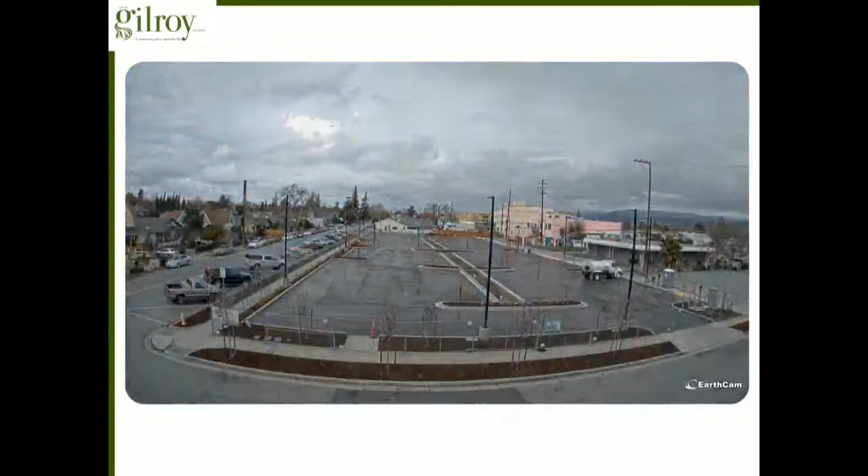That's a pretty cool project, so hope you guys enjoyed that.

So let's kick it off here. First of all, let's talk about why we have a CIP program. The CIP represents an ongoing planning process through which the city identifies, prioritizes, and develops a multi-year work plan for major capital expenditures and their associated funding sources. The CIP documents the project details required to improve and maintain the city's roadways, parks, facilities, and utilities, as you'll see as you go through the document there.

The different areas of our CIP program consist of our streets, which is our roadway system, parks and trails, parks, sports fields, park structures, trails, tree planting. Utilities, like Jimmy mentioned, water, sewer, and storm drain. We have a lot of those projects in the package here. And public facilities: city buildings, structures, and equipment.

The definition for a project to get entered into our CIP program has to follow these protocols here. Basically, they have to have a total value greater than $25,000, have an estimated useful life or extended estimated useful life of 5 years or more, require advanced planning and design, have a project duration of more than 3 months from inception to completion, and primarily be a non-recurring project. Also, it needs to be developed or implemented at a fixed location. That's the criteria to meet.

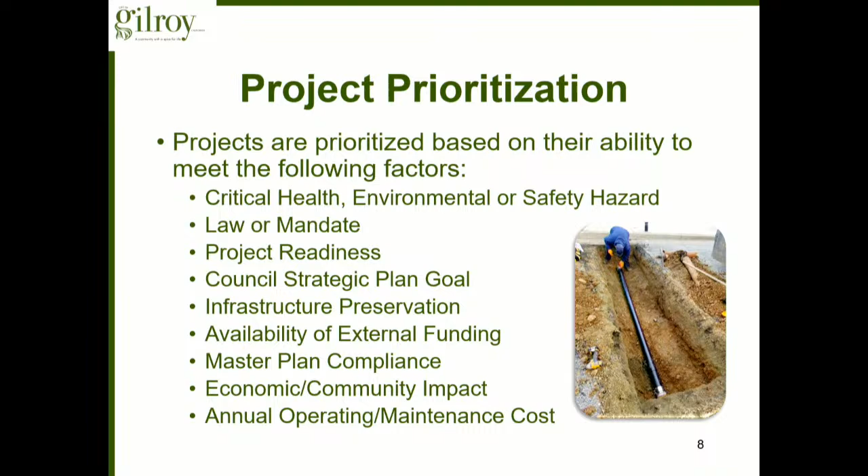Here's an example of one of the projects you'll see in your packet here. This is our Uvas bridge over Uvas Creek on 10th Street. We'll go through this as an example of what a typical charter will have that you'll see throughout your budget book. It basically contains this information: the project name, project number, the category, department, project type, project manager, council priorities, location, project photos, description and purpose, project justification, and master plan documents. So there's a very extensive set of information on each project that you can get familiar with if you're not familiar with these projects, to know where it's from, what it's for, why it's here.

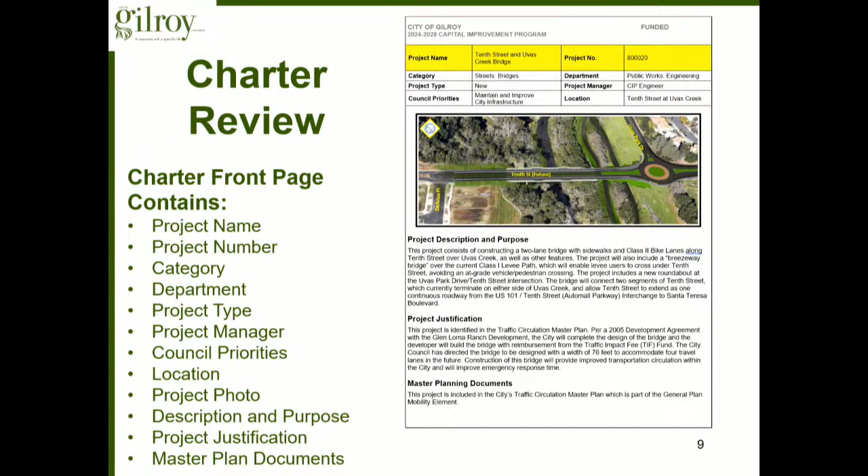And on the back of each of those sheets, you'll see there's more information. If you flip the page in your booklet there, that's the back page that contains the project funding, project costs, funding sources, financial comments, estimated project schedule, and ongoing operational cost impact. So you can look at where all the funds are coming from, what funds they're generated from, the schedule that we're trying to meet, and any more comments to help define the project for you. So this will give you a good resource to understand each of the projects.

Some highlighted projects we're going to talk about tonight. At the front end of your CIP book includes a section that highlights projects recommended for consideration by the City Council. The next several slides will provide a preview of those projects. Many projects are related to ongoing programs and are minor in nature that are included as well.

Annual citywide pavement rehabilitation. We're very familiar with this, we talked about it on Monday night. We just had a large award, over $6 million for our second year of our program. This project will rehabilitate the city's pavement condition. The city has 265 existing lane miles of paved roads with an asset value of over $332 million. The current funding seeks to maintain and improve our PCI amidst rising construction costs, and construction over the next 5 years is approximately $18 million of investment.

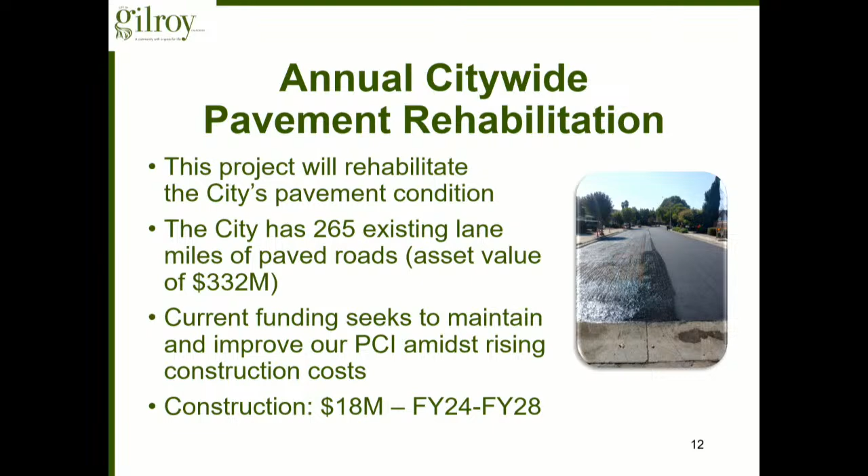Here's another fun project, the Ice Center Infrastructure Project. This project is to design and install the infrastructure for the future Gilroy Ice Center. It includes traffic signal and frontage improvements, site grading, stormwater and sewer collection systems, water distribution systems, joint trench for utility connections, and the approximate construction is about $5 million over the next couple of years, year 24, 25.

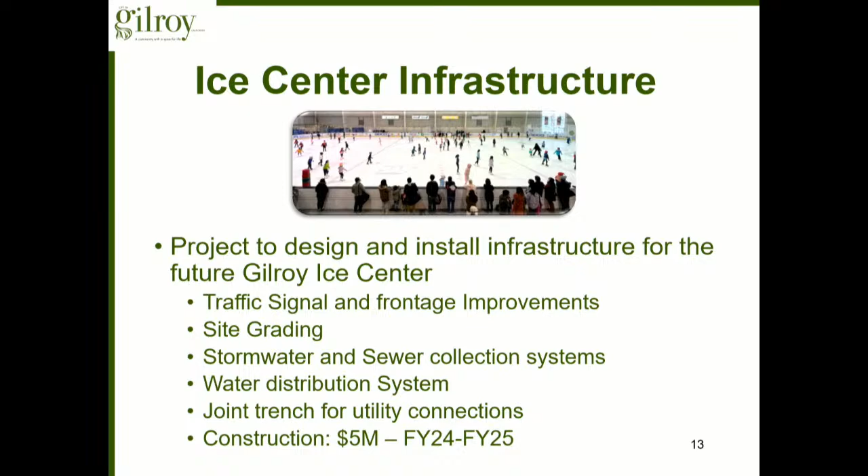Civic Center Master Plan - this is another big lift for us. This project will examine the city's facilities within the City Hall complex area, identify replacement costs, identify phasing plan and implementation plans. Buildings to be reviewed are the Community Center, City Hall, Senior Center, City Hall Annex, the Wheeler Auditorium, and the Dowdy Building. The planning cost for this project is probably coming in around $750,000 for next year. They'll be evaluating the replacement of all those buildings except the PD building and, of course, the library.

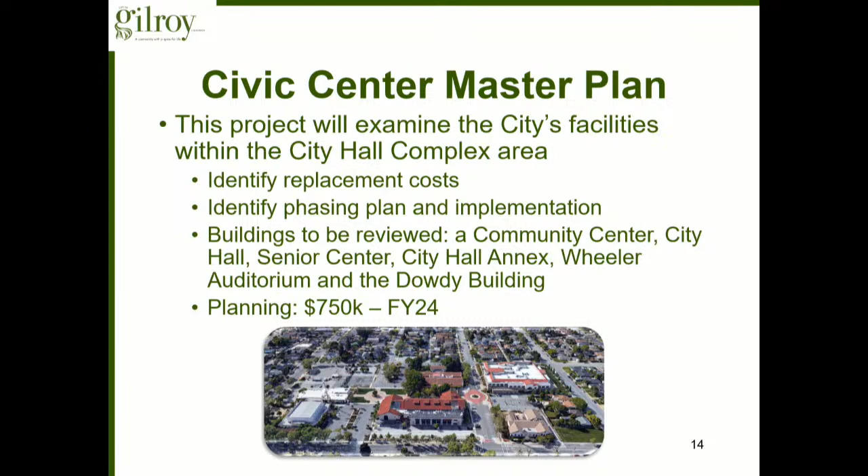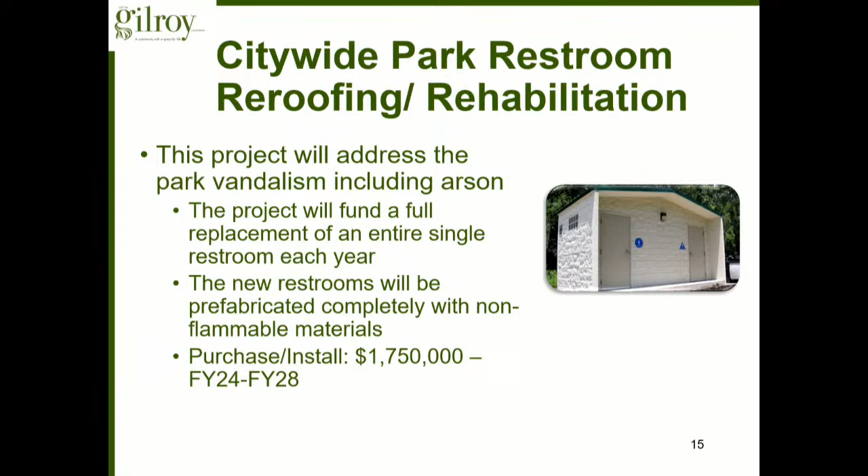The next one is a citywide park restroom re-roofing rehabilitation. As a lot of you know, we've had a lot of vandalism out in our parks, arson issues with a couple of bathrooms burning down, arbors getting burnt down. This project will fund a full replacement of an entire single restroom, as you can see in the picture here. The new restrooms will be prefabricated completely with non-flammable materials and delivered to the site. The purchase install costs are $1.75 million over the next 5 years, so we'll try to replace one per year.

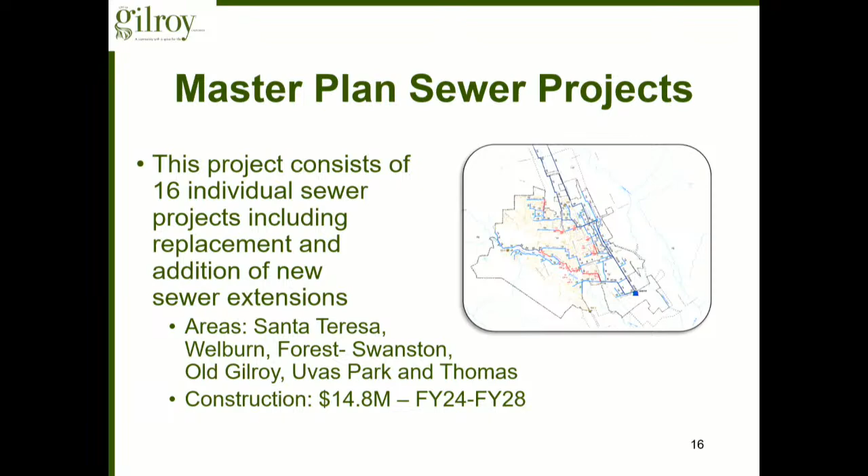The next large project is master planned water projects. This project will consist of 26 individual projects throughout the city to mitigate existing deficiencies and account for future growth to the system. Types of projects here are 13 pipeline replacements, 9 new extensions, 1 storage reservoir improvement, and 3 groundwater well improvements. The estimated construction cost on this is $9.4 million over the next 5 years.

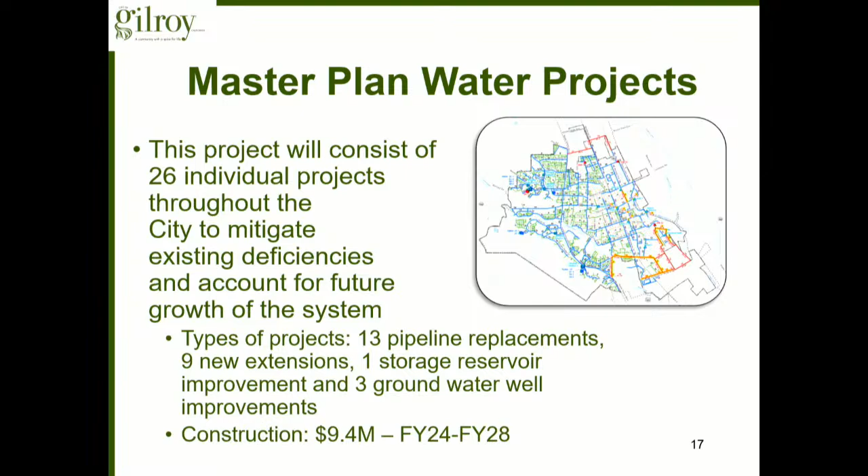Another project we're working on is the joint Morgan Hill Gilroy trunk line repairs. This project will mitigate sewer joint trunk line deficiencies, including pipeline and manhole repairs. This consists of 5 trunk line major repairs and 40 manhole repairs. Approximate construction for this project is almost $2 million, and that's half of the cost that we'll be sharing with Morgan Hill.

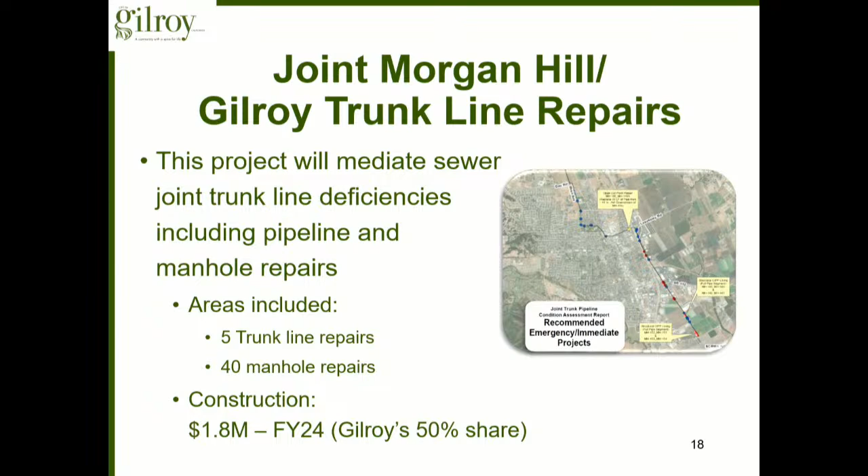Here's the project we looked at the beginning, the new bridge over Uvas Creek - the 10th Street and Uvas Creek Bridge. This project consists of a 2-lane bridge with sidewalks and Class 2 bike lanes along 10th Street over Uvas Creek. The project includes a roundabout at Uvas Park Drive and 10th Street, a bridge spanning Uvas Creek, and connection to the Santa Teresa road network. Construction is approximately $27 million. We're hoping to get that kicked off in fiscal year 26. We currently have a grant application in process, and Bryce is staying on top of that. We should hear probably in June - yeah, so June we should hear whether we have that or not.

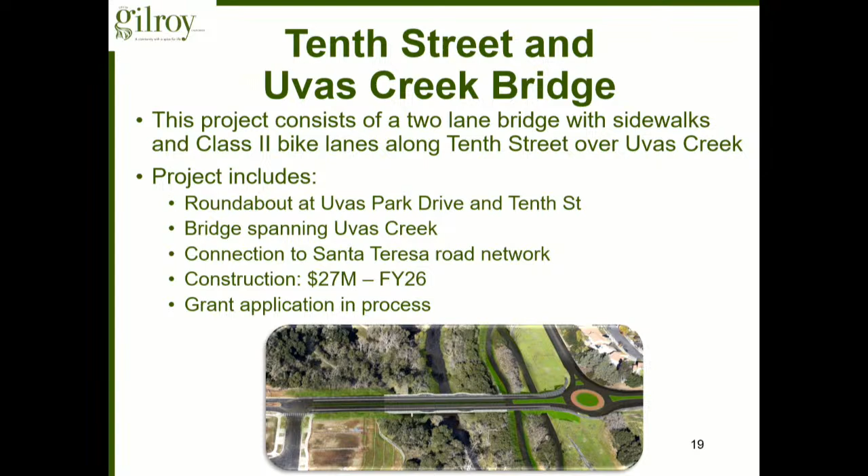Here's another one of the unfunded mandates Jimmy was talking about earlier. The state's forcing us to make sure that we do not release any trash into the public waterways. This project addresses the state's mandate to implement system-wide trash capture devices. The state mandates a 35% capture rate by 2026 and a 70% capture rate by 2028, including cigarette butts and anything of that size. Construction will cost about $1 million over the next 5 years. You can see two of the devices we're purchasing now, which we'll place into some of our drain inlets throughout town to test which one works best before purchasing the rest.

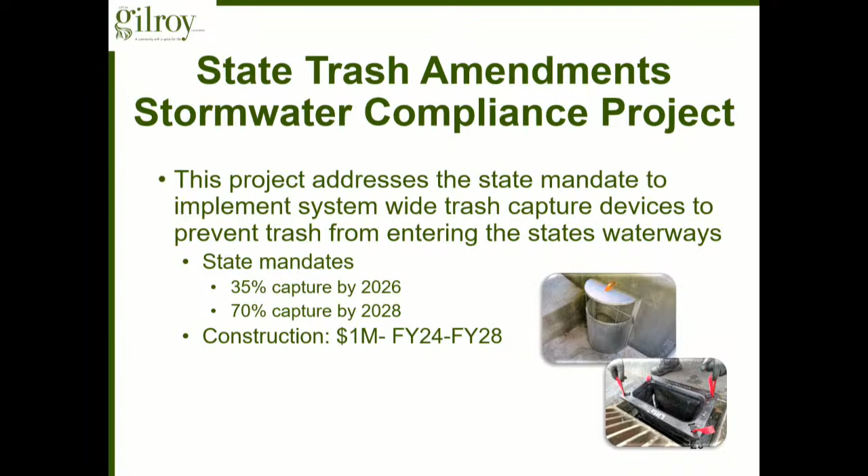Project 21: 10th Street Highway 101 bridge widening. Julie and I have been on Zoom calls for the last two days with the designer on this project. This will widen the existing bridge overcrossing at 10th Street with an additional lane in both directions, making three lanes each way. Potential design features include widening the bridge structure from 4 to 6 lanes, working with the intersection and weaving issues on the east side, ramp improvements, bicycle and pedestrian improvements, and signal modifications. They're looking at multiple bike and pedestrian options, maybe moving them all to a single side with a larger protected lane. As soon as we get those design options, we'll bring them to Jimmy and yourself. Design costs right now are $1.3 million for Gilroy, and the VTA has matched that with $7.6 million currently. The estimated construction cost once designed is approximately $50 million.

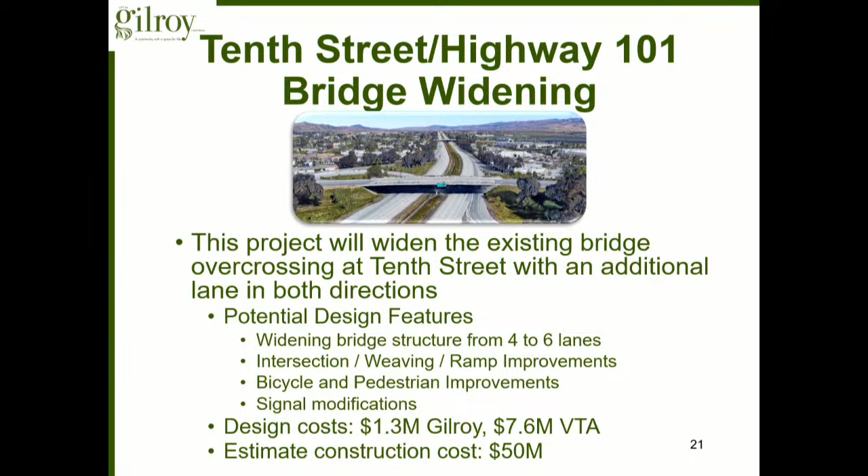Since that's the 101/152 interchange, shouldn't Caltrans be paying for at least part of it? For the construction, yes. The $7.6 million of design cost is coming from VTA, and the $1.3 million is Measure B funds, so it's not coming out of our general fund. But where's Caltrans in this? It's their road—they'll be involved in the actual construction of the expansion when it comes to that. VTA is doing the planning and design, but Caltrans will have to weigh in on construction, kicking in some funding. We haven't defined the construction cost or solution yet—that will come through VTA and Caltrans with different grants as they build out the corridor. The $50 million is the estimated cost to construct the improvements, and that's not something we're liable for since it's not in our jurisdiction or right-of-way.

Daryl, before you continue, is there a way to follow in our binder what you're doing here? It's not organized that way? No, we're kind of jumping around at different projects at the beginning. Okay, thank you.

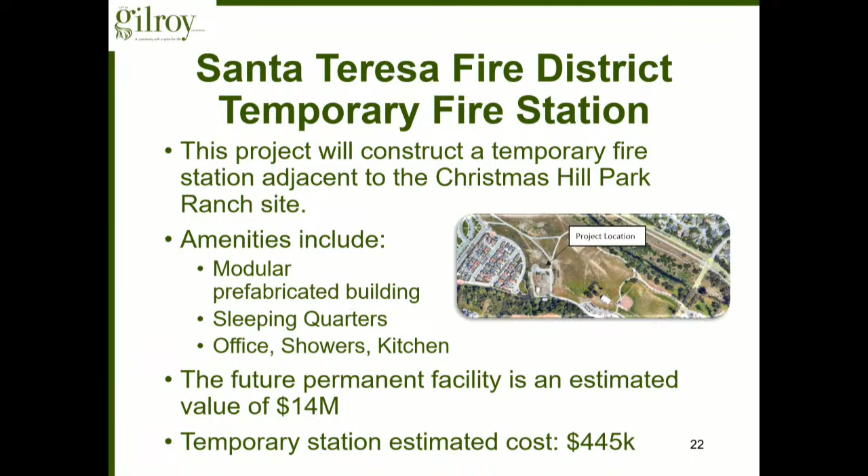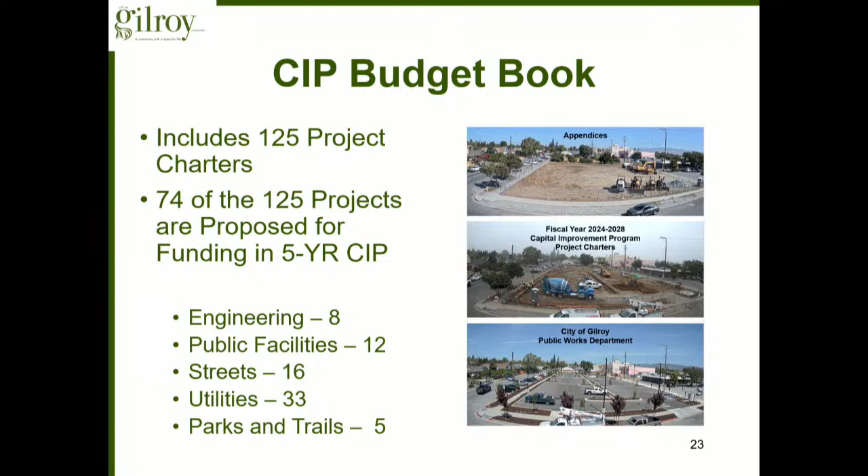This CIP budget book includes 125 project charters—that's a lot. 74 of those 125 projects are proposed for funding in the next 5 years. Of those 74, 8 are engineering projects, 12 are public facility projects, 16 are streets projects, 33 are utility projects, and 5 are parks and trail projects. For a cost breakdown: engineering projects are about $8.7 million, the 12 public facilities projects are about $6.5 million, the 16 street projects are $67.8 million, the 33 utility projects—the big lift Jimmy talked about—are about $91.5 million, and the 5 parks and trails projects are $6.5 million, for a total of 74 projects at a whopping $181 million over the next 5 years.

Another thing to note is the general fund is contributing funds for 2 years of street maintenance and annual park restroom upgrades with this budget as well.

Community engagement: we met with the Parks and Rec Commission on April 18th. We discussed several of these projects, and they were, of course, more interested in the parks types of projects.